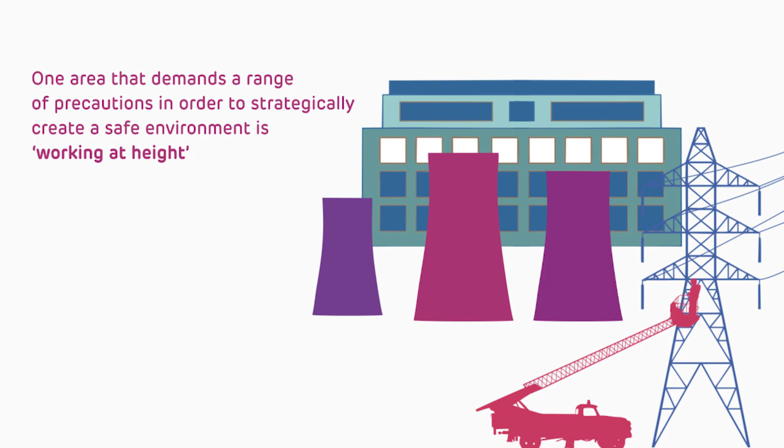Adani Power Limited, in collaboration with Messrs. Dupont, has embarked on a safety culture transformation project, Chetna. As a part of Project Chetna, certain standards that describe the principles used to protect employees from the hazards of working at heights are set. These standards will help provide a new impetus towards establishing best-in-class safety systems.

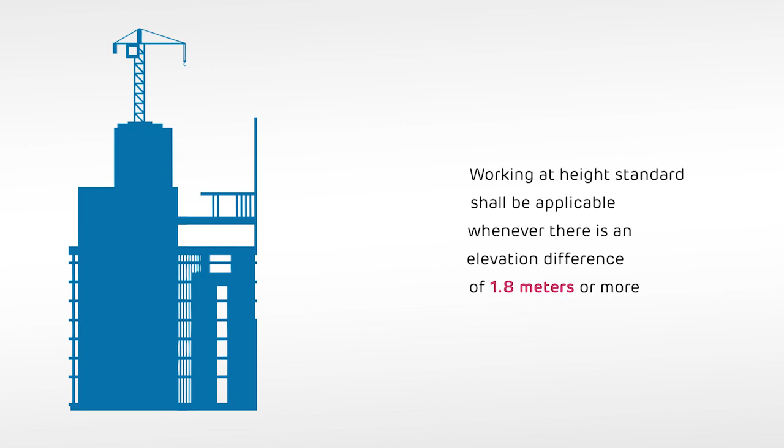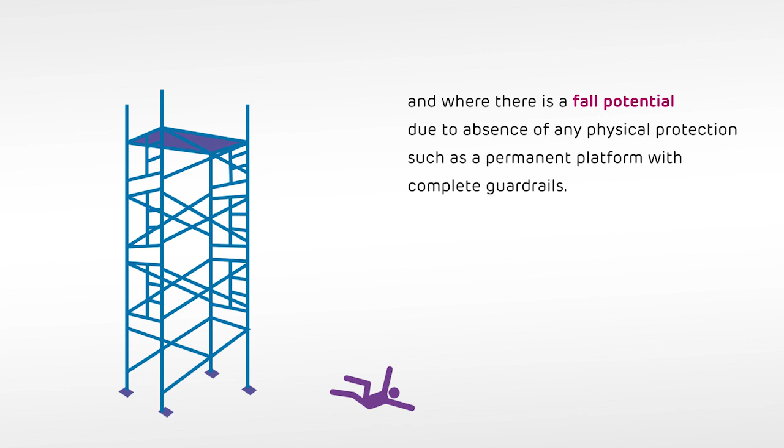Working at height standard shall be applicable whenever there is an elevation difference of 1.8 meters or more, and where there is a fall potential due to absence of any physical protection, such as a permanent platform with complete guardrails.

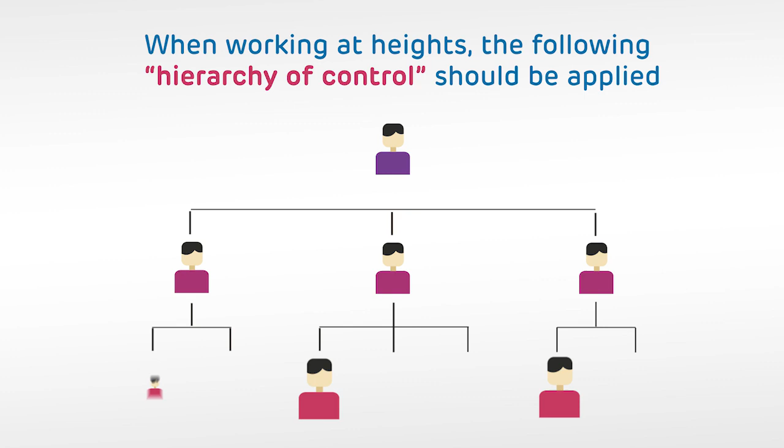Principles of working at heights. When working at heights, the following hierarchy of control should be applied: eliminate the work at height hazards, reduce the risks to an acceptable level, and use other required personal protective equipment or PPE, like a full body safety harness.

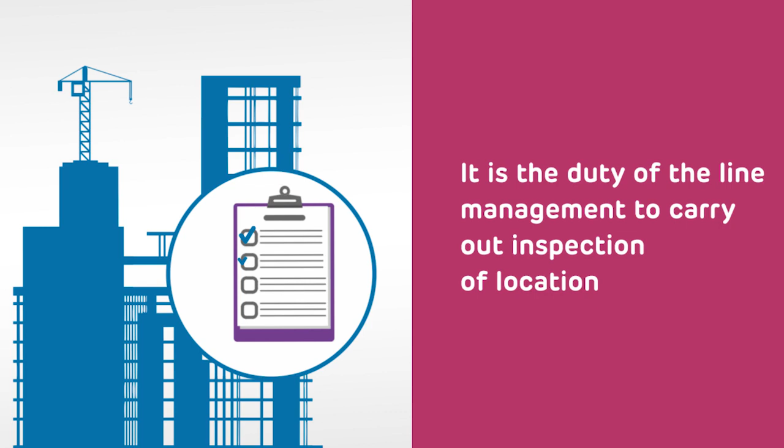Steps to be followed for working at height. First, identification of hazards and risk assessment. It is the duty of the line management to carry out inspection of the location to identify hazards, including specific location constraints. Based on this, resources shall be allocated and responsibilities for safety during work at height shall be assigned.

Planning and preparation of the task and rescue in case of a contingency. Based on the risk assessment, the team shall mobilize fall arrest systems, other equipment and manpower, and shall also ensure that appropriate rescue equipment, team and plan are in place.

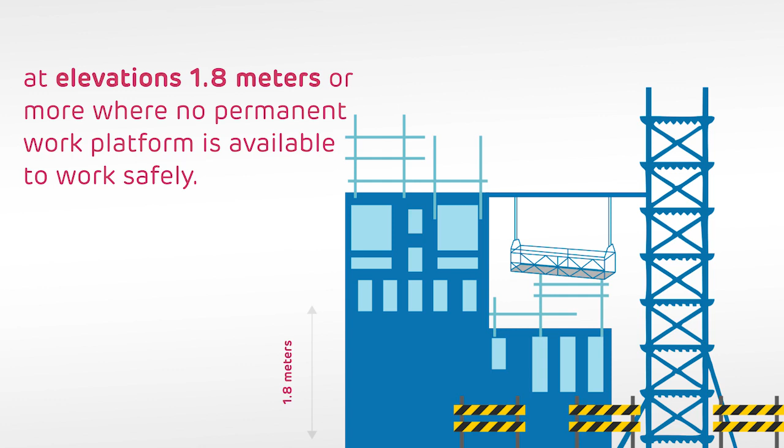Proper scaffolds or temporary work platforms along with guardrails shall be provided for working at height at elevations of 1.8 meters or more, where no permanent work platform is available to work safely. Makeshift arrangements like drums, barrels, chairs and rope ladders shall not be used.

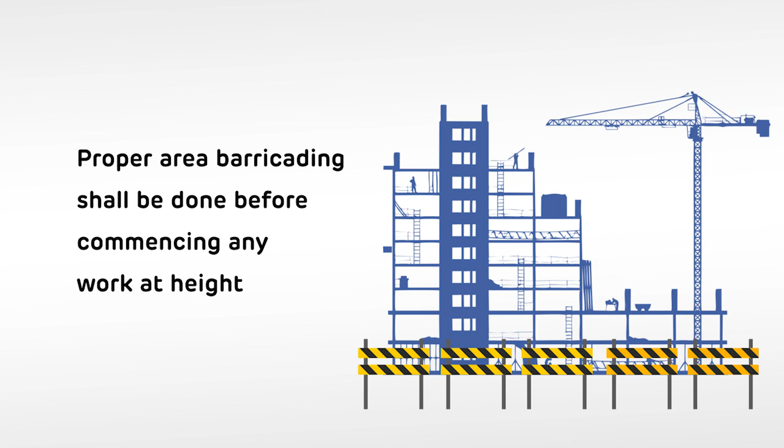Proper area barricading shall be done before commencing any work at height. If barricading is not possible, a safety net shall be provided and work in progress boards shall be displayed.

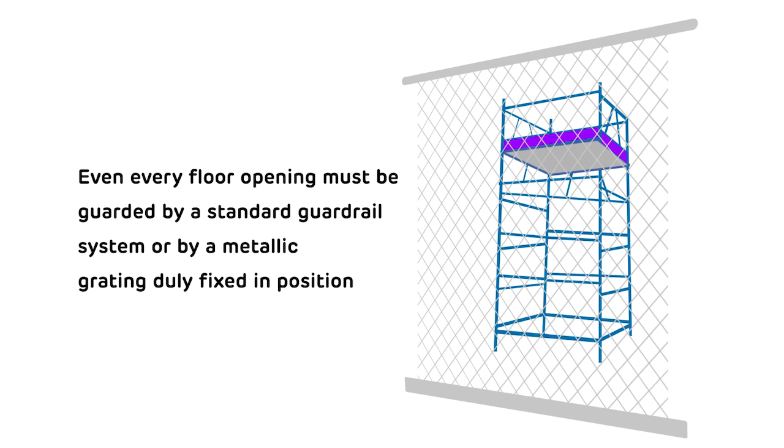Allocation of protective equipment: guardrail system. Installation of an appropriate guardrail system with toe boards around the work area is required for fall protection. Also, every floor opening must be guarded by a standard guardrail system or by a metallic grating duly fixed in position.

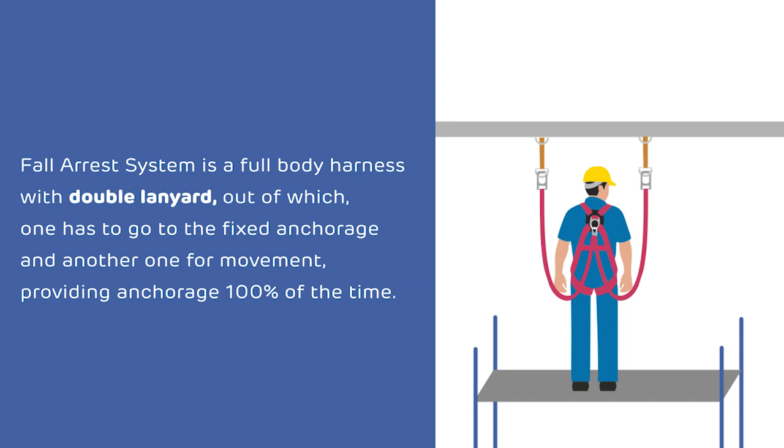Fall arrest systems. A fall arrest system is a full body harness with double lanyard, out of which one has to go to the fixed anchorage and another one is left free for movement, providing anchorage 100% of the time. Self-retractable lifelines, or SRL, are a method of providing vertical lifelines for ladders, scaffolds, etc.

Safety nets are to be provided for protecting people below from human fall and material fall. However, safety nets alone shall not be used as a fall protection system.

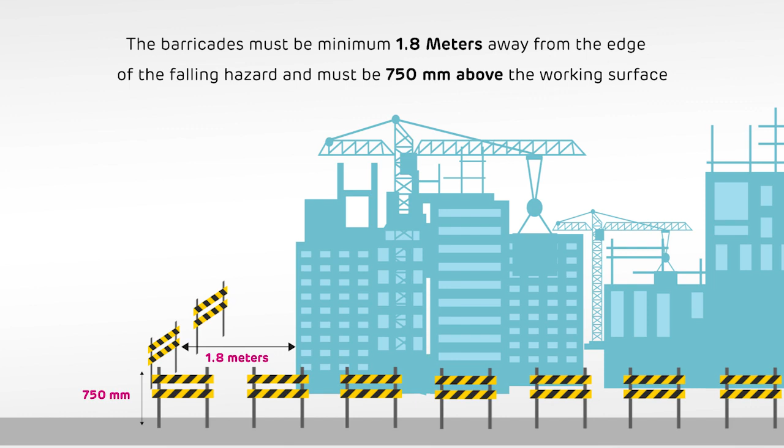Barricading or warning line systems: cautionary barricades. The barricades must be a minimum of 1.8 meters away from the edge of the falling hazard and must be 750 mm above the working surface.

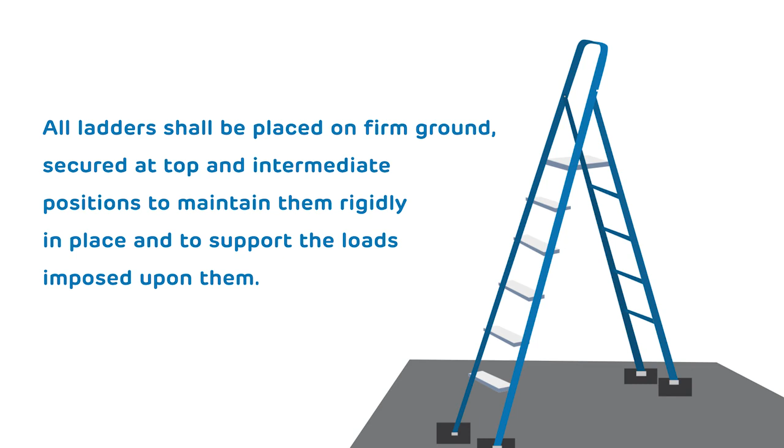Step ladders. If working on a step ladder with height 1.8 meters or higher above the floor, fall protection equipment shall be used. Insulated ladders should be used for working on electrical equipment. All ladders shall be placed on firm ground, secured at top and intermediate positions to maintain them rigidly in place and to support the loads imposed upon them.

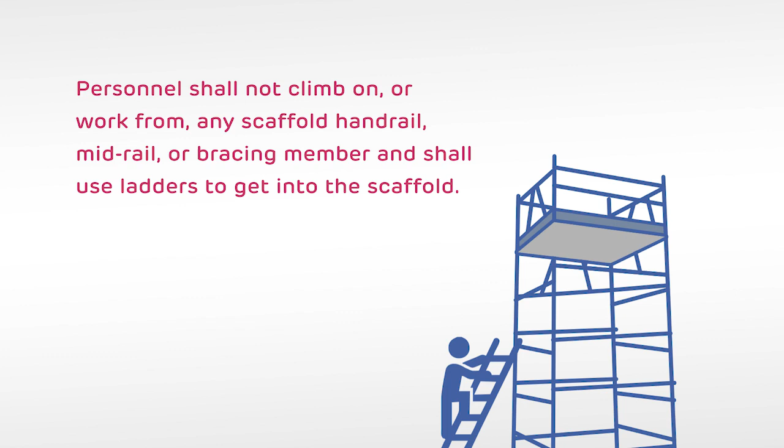Scaffolds. Fall protection is required whenever working from scaffolds 1.8 meters or higher above the ground or floor level that have incomplete standard handrails or midrails or is not completely decked. Personnel shall not climb on or work from any scaffold handrail, midrail or bracing member, and shall use ladders to get into the scaffold. Proper fall protections shall be used while building scaffolds.

Authorization and execution. Working at height must be authorized through a work permit for all activities. Prior to authorization, it must be verified that the persons engaged in the work at height activity are medically fit and do not have vertigo, height phobia, or any other illness which makes them unsuitable for working at height.

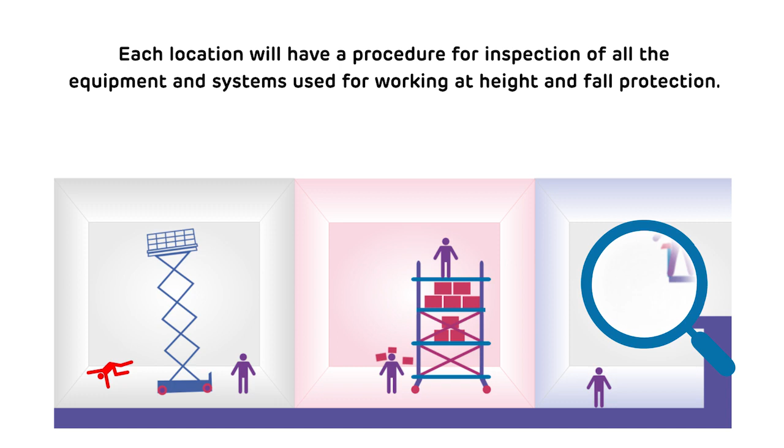Inspection requirements. Each location will have a procedure for inspection of all the equipment and systems used for working at height and fall protection, training and certification. All personnel who work at height must be given practical training on the use of the fall protection system.

Working at height has a lot of inherent risks, and it is imperative that this standard be followed to eliminate these risks. While compromising on workplace safety, it would do well to think of what is on the line, of the price one would have to pay for the little time that is saved.